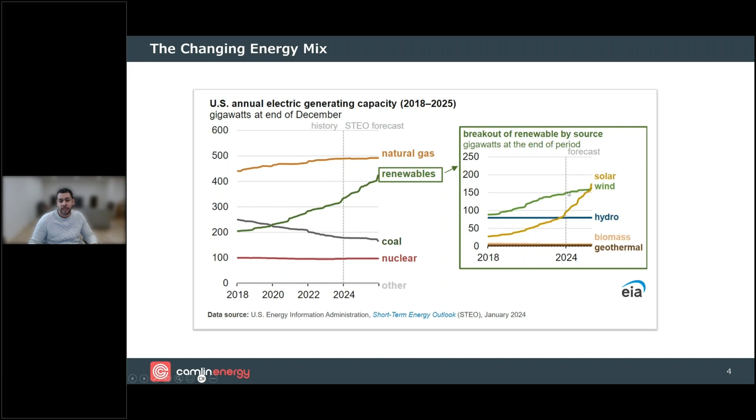So what that means is that fluctuation has to be absorbed by the other conventional generation sources that are available, so both hydro and natural gas. So although we see the rapid rise in capacity, that doesn't reflect in actual generation in kilowatt hours that's distributed.

So we kind of preempted that, but the operating changes, what that means for hydro and fossil fuel, obviously reduced utilization. That's an intended outcome. We want to reduce fossil fuel generation. Hydro, we want to optimize that as well, but the wind and solar, when they're available, it's important that we maximize their utilization. We don't have the same capability at scale to store as we do with hydro.

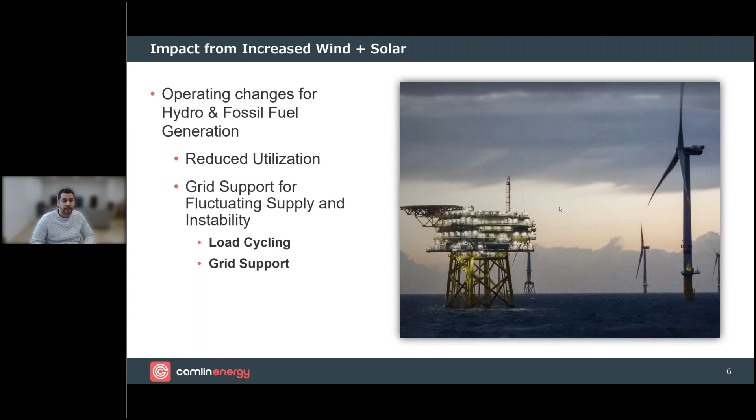Fluctuations in wind and solar will require that fossil fuel generation goes into frequent operating transitions. This is load cycling, the process of going from high to low load in shorter periods of time.

The problem with that is it leads to deterioration of these assets. The thermal stress imposed by forcing them from high to low temperatures and low to high temperatures forces expansion and contraction of the physical components. Deterioration can also be imposed just from mechanical fatigue. The fast changes in temperature, the expansion, contraction, but also the vibration that's ever present can lead to things like deformations in the assets as well as cracks to some components. All of this can result in increased maintenance and reduced lifetime.

Generation that has traditionally been base loaded or at least predictably loaded - even hydro, though normally cycled between daytime loads and nighttime pumping of water for storage - will also be cycled more frequently as wind and solar become available throughout the day. So this impacts both hydro and fossil fuel-based natural gas generation.

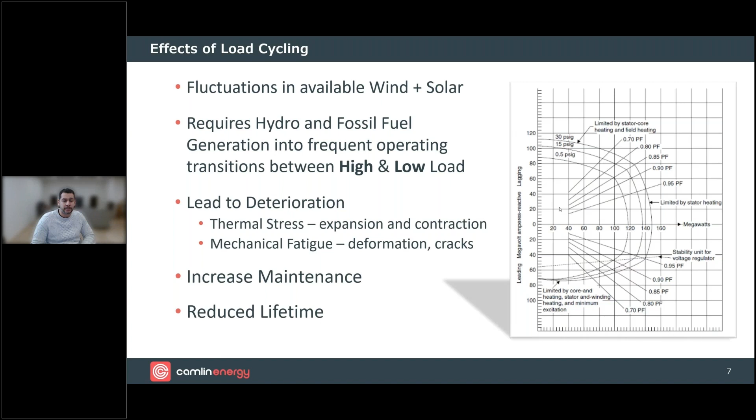Now, when we consider the stresses, I know there's a lot of intuition about how cycling can affect mechanical components - there's a greater inclination for understanding mechanical components. Cycling on and off is inherently stressful, but the stator winding is something that can be a little less intuitive and is often overlooked.

So here we have a figure from NERC showing failure rate data relating to the different components of a turbo generator. You can see that overall the stator winding represents quite a large proportion of the overall failures - it's the second most frequent failing component next to rotating components. But the stator includes the winding, core, and clamping structure. So when we consider the stator core and stator frame together with the winding as one entity, this actually exceeds the total failure rates for rotating components, making it the largest overall failure rate of any component associated with the turbo generator.

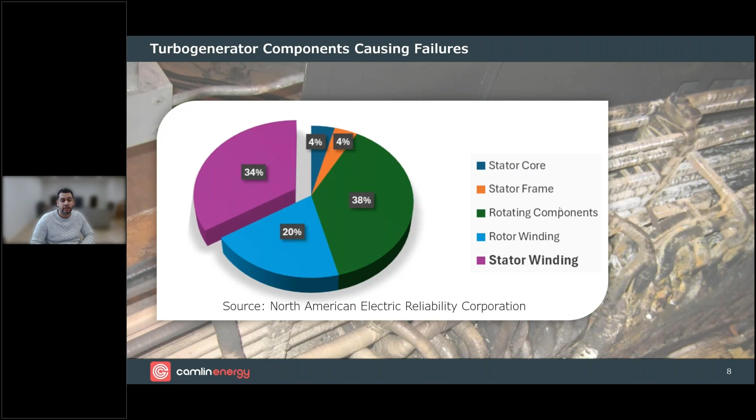So what are these effects? When we consider mechanical fatigue, this includes all the components relating to the stator - the core, the frame, the clamping structure, and the laminations. When we force a unit through frequent load cycling, for example, we can end up with a loosening of the overall system because of fatigue and more consequential core vibrations.

Fatigue on components, particularly the clamping fingers, can cause a lot of damage. You see here on the right panel two images. The upper image shows the effects of fretting - movement of the core and vibration causes fretting that deposits rust and debris onto the winding end arm surfaces, which can compromise the insulation of the end arm regions.

In an even worse case, in the lower right picture, we can see the clamping finger is actually missing. Just from vibration and embrittlement over time, mechanical fatigue to those components can cause breakages and loss of clamping fingers, and this becomes a more serious risk - a clamping finger in the stator could cause a lot of damage if it catches between the rotor and the winding.

And even just the abrasion - this movement causing abrasion to the winding surfaces - can lead to shorter times to failure. Part of that is when you have this abrasion and vibration on the winding surfaces, it can lead to removal of some of the semiconductive coating that's there to provide appropriate grounding of the stator slot, and that can lead to sparking discharge when you have that kind of abrasion.

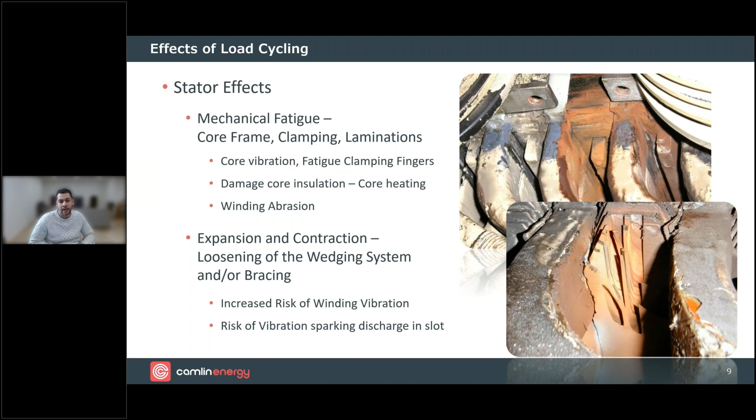The load cycling also affects the internal insulation. We just looked at external effects to the winding, but internally there is an effect too. This is something quite commonly understood. There's actually a design type test for testing cycling effects on winding insulation, typically done in laboratories to qualify a new winding design for a generator. These are described in IEEE 1310, for example.

The intention of the test is to simulate the load cycling by cycling high current through the windings. Here on the right panel is a test setup at the Manitoba Hydro Lab in Winnipeg, Canada, where they cycle high current through the winding.

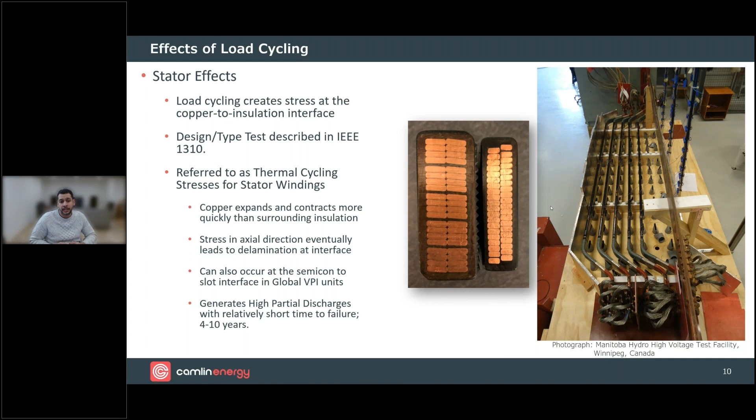With that high current, the copper in the interior has a larger coefficient of thermal expansion than the surrounding insulation. When that occurs, it can impose stress at the junction between the insulation material and the copper itself. That expansion creates a shear stress, in the axial direction, and that shear stress can lead to voids and delamination at the junction between the copper and the insulation.

Here's a sample photograph from a text showing thermal cycling effects, where you have separation occurring between the insulation and the copper. When that occurs, you end up with high electrical stresses at this region that lead to high partial discharge activity, which can be one of the shorter times to failure, within 4 to 10 years.

The effect of axial stress and thermal cycling can also cause delamination at the slot interface for global VPI units, where the insulation is impregnated into the core assembly with the windings installed. It's important to have bonding between the slot section and the core. If that becomes delaminated, you can have discharges at those sites as well.

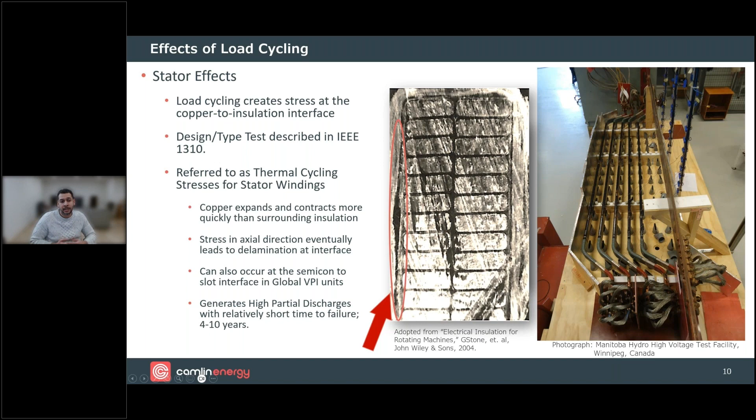So load cycling is one component. The other to consider is the effect of operating as a grid support. Generators, to support the ingestion of more wind and solar, need spinning reserve as well as system support for the fluctuations.

The fluctuation in supply requires generation on the grid connected for voltage support as well as frequency regulation. Operating generators this way might not be intuitive, but operating something traditionally base loaded at low loading levels, when connected to the grid, can sometimes have adverse effects for units not normally operated that way.

Operation at low efficiency can impose more wear and tear, since generators typically aren't as efficient at lower loading levels. Also, there's a coefficient of expansion of the overall winding within the slot, so at higher temperatures, vibration of the windings in the slot sections might be reduced.

If vibration is reduced at higher loading, when you back off to operate at low loading, there may be a slight contraction in the windings, resulting in a looser winding. Loose winding is already a problem, as we discussed earlier, since that vibration can lead to discharge at sites within the slots of the winding.

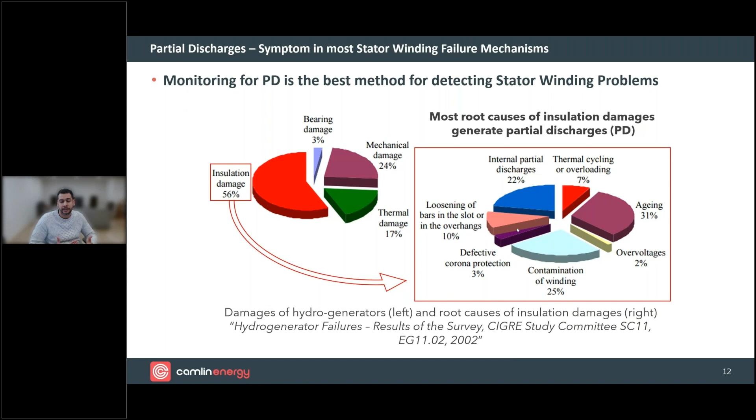As we focus on partial discharge relating to these specific defect modes, this reinforces why online partial discharge monitoring can be a very valuable tool in identifying defects associated with load cycling, running units for grid support in this situation where we have to ingest more renewables.

The first one relating to loose bars and vibration is related to thermal and mechanical fatigue. Fatigue of components like the wedging system or the bracing is attributed to expansion and contraction of the winding with frequent cycling, and that can loosen these systems and lead to more vibration due to loose bars.

Partial discharges relating to loose bars and vibration are generally well observed at higher loads, since greater magnetic forces are imposed on the winding. If it's loose, we're more likely to see those effects in that operating region. Abrasion relating to this vibration can also lead to additional slot discharges.

For aging and thermal cycling stresses, we can detect these discharges correlated to low temperatures. At higher temperatures, expansion of the materials may reduce the overall void size, and the partial discharge inception voltage is a bit higher. So it's really at lower operating temperatures that partial discharges relating to aging or thermal cycling stresses would be more evident. If we operate at reduced load for grid support, and the generator isn't typically operated at low loading, this can be an accelerant for PD deterioration.

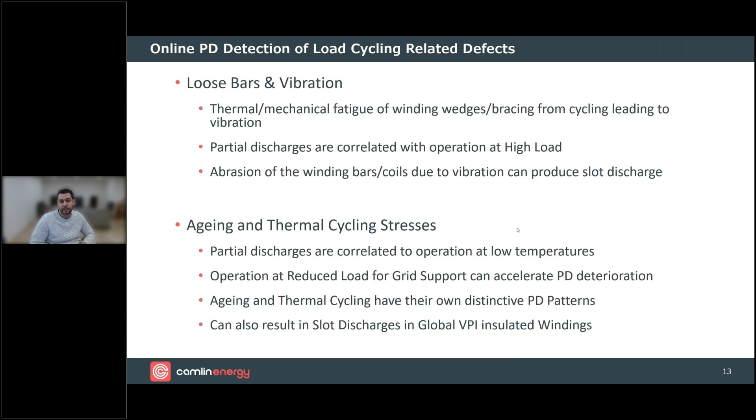Looking quickly here at slot discharges, we can see the effect of loose bars. This is where thermal and mechanical stress on the winding have led to fatigue, which has introduced more vibration in the winding. That fatigue could be associated with the wedging system, the bracing externally in the end winding regions, but also could be due to winding shrinkage.

Partial discharge is correlated with high loading in loose bar situations, and this is intuitive because at higher loading is where more magnetic forces will act on the winding, leading to more vibration.

There's some thinking that when approximately 30% of the semicon is lost, that's where you run into a danger of failure being likely. Partial discharge characteristics for this tend to have larger pulses on the positive polarity than the negative half cycle. Progression to failure can be quite quick in this case, roughly two years.

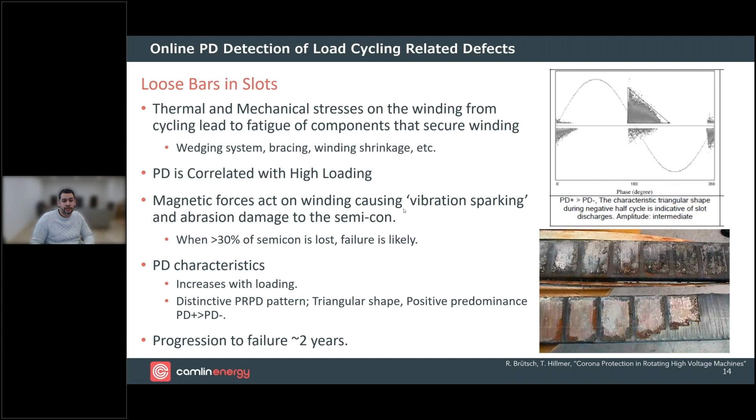In terms of end winding vibration, we've already looked at some of these cases, but abrasion of the semicon regions can be quite a problem here, and failure can also be caused due to cracks in regions of the winding.

We can see here a crack in the end cap, so some indications of movement of the winding at this location. These vibration and movement effects in the end winding regions can be detected with fiber optic vibration sensors. But similar to the previous defect of vibration in the slot, you can have short times to failure here as well.

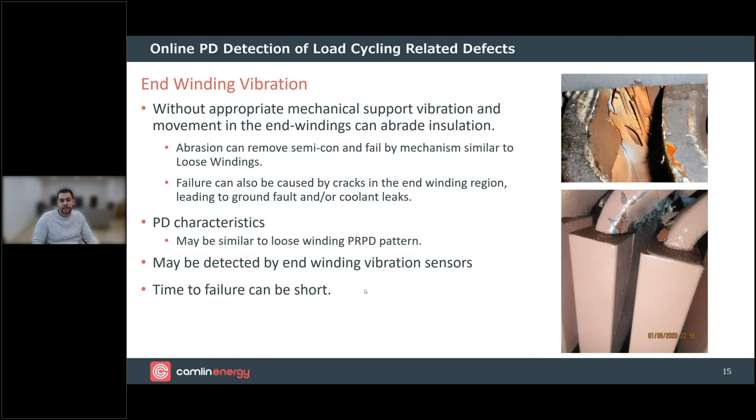For the aging or thermal cycling type discharge, we want to detect these by a distinctive pattern where they have kind of symmetrical partial discharge patterns on each half cycle. The cause of this is when, through normal thermal aging, it leads to debonding of the polymer, which causes voids distributed throughout the insulation system.

At low loading, if we're obligated to operate at low load for grid support, the discharge activity can be more repetitious in this situation, since the voids result in higher partial discharge at reduced load.

Conventionally, these would be quite long until failure, 25 to 30 years. But if a unit is already weak, already well aged thermally and has voids in the winding, and we begin to operate these generators for grid support, then the progression of partial discharges may be accelerated by this kind of new operation with more thermal cycles and more operation at lower loading points for grid support.

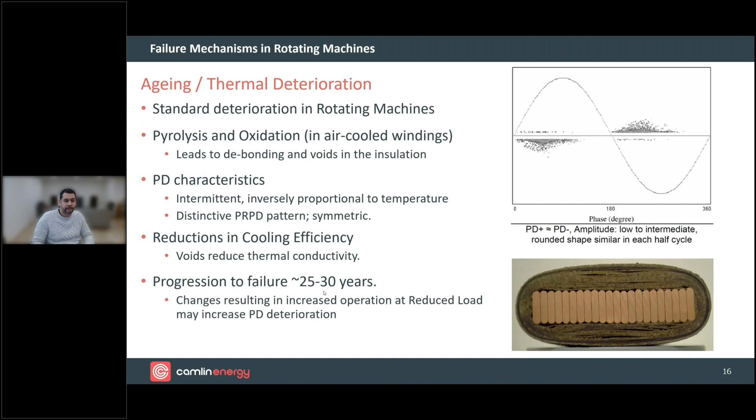Now, thermal cycling discharges can be detected by a distinctive pattern also, with higher partial discharge magnitudes associated with a negative half cycle. So with an online monitor, we'd be looking for these types of patterns. The starting and stopping operation leads to expansion and contraction, and when we have delamination at sites close to the copper, these can be defects that lead to pretty short times to failure, between 4 to 10 years.

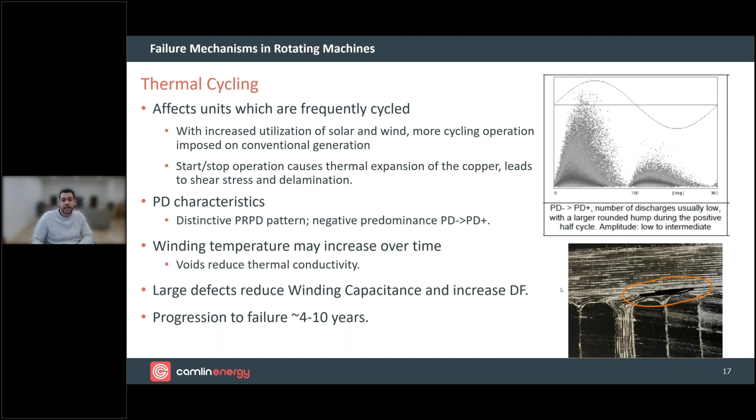With an online partial discharge monitoring system, it's not just a standard conventional measurement where many would do a spot measurement maybe at high loading. But as you've seen, some defects are more active at lower operating loads and temperatures. There is a dependence for the partial discharge activity based on the operating characteristics of the generator.

This has been identified in various industry standards and guides. The figure here from IEC 60034-27 actually prescribes measurement of partial discharges at various points within a procedure. If you can, run the generator initially at low load and then increase the loading to a high loading point, you would repeat PD measurements there, and then again once thermally stabilized, backing off on load and waiting for temperature to stabilize downward.

Measurement of partial discharge at each of these operating points would help identify certain types of PD defects that could be associated or attributed to load cycling or operating to accommodate renewables ingestion into the grid.

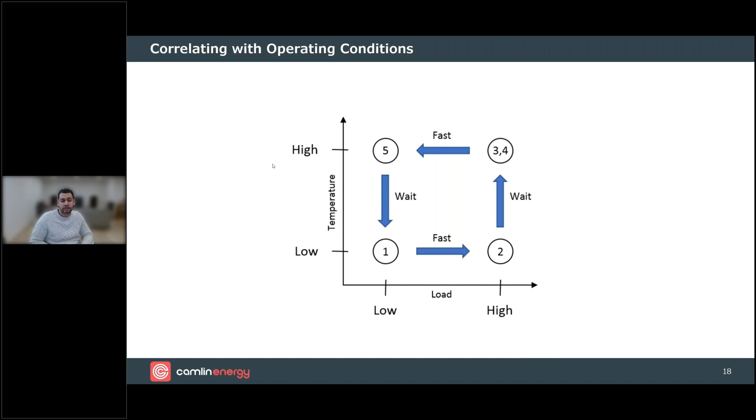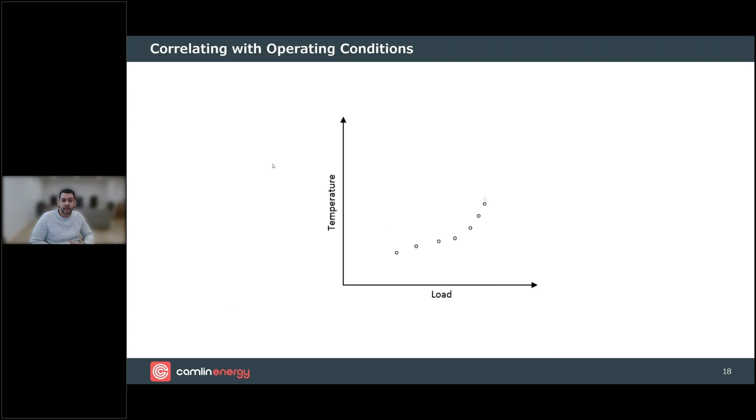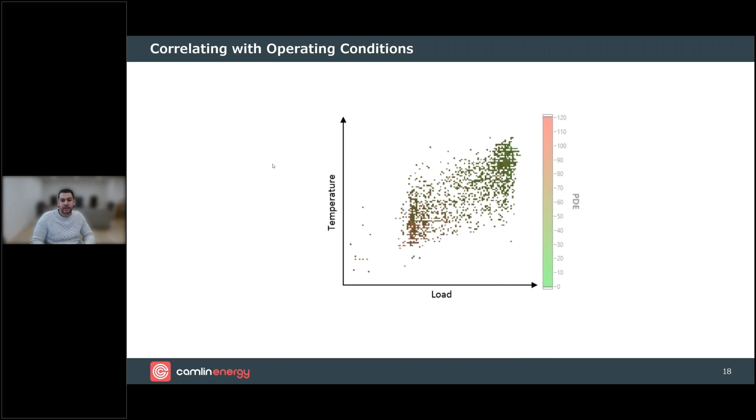So if this can be done passively, if you can have an online monitoring system that monitors the discharge activity at these operating points, we can then populate a large number of discharge acquisitions at various points of operation. Each of these points might reveal something informative about discharges in a specific region.

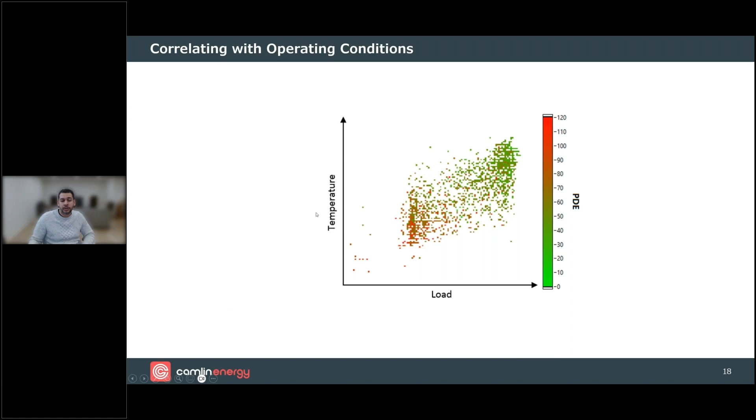We can see here at lower load and lower temperature, the colored red data points indicate higher discharge activity. So it's actually not in all instances up at the higher loading point, which is where generally I think many utilities perform their partial discharge measurements. But really, it's important to investigate the discharge activity and intensity over a range of different operating characteristics.

Relating specifically to monitoring for effects from load cycling, we can focus on the region at lower loading and lower temperature. At low temperatures, this is where we'd most likely notice effects from aging or thermal cycling defects. And if the defect is associated with loose winding and vibration, these would be observed up at the higher loading regions. So both of these are important to track and trend.

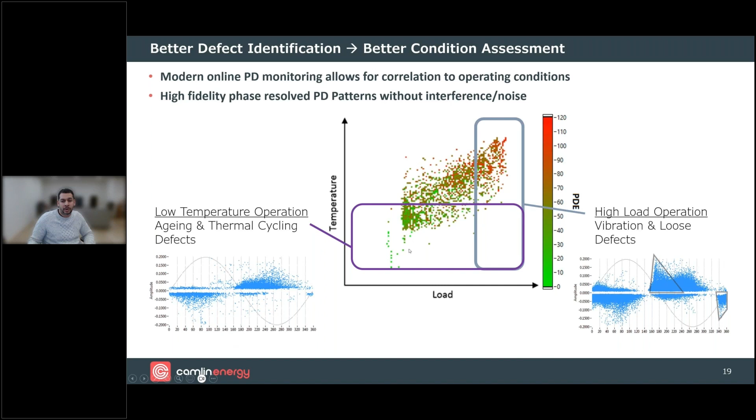With modern online partial discharge monitoring, we can do this correlation. We can see where these defects are present, and then, seeing where they are present, we can trend and make operating decisions that are appropriate for each generator at the time. If this is a bad generator for grid support because it has high PD due to aging and thermal cycling defects, then we may not run this generator for that purpose, and we may choose a sister unit for that application.

So, some key takeaways here.

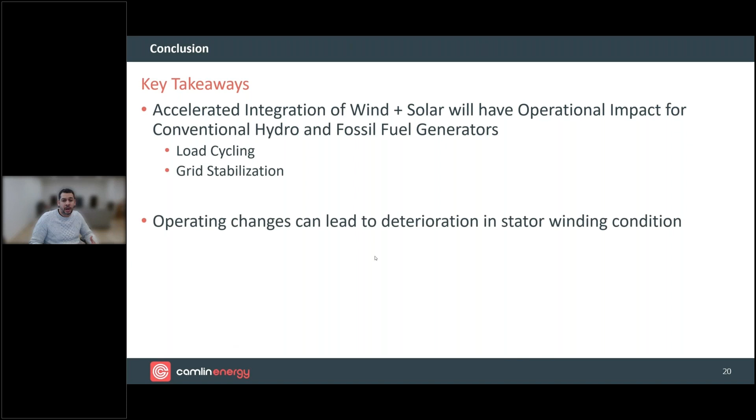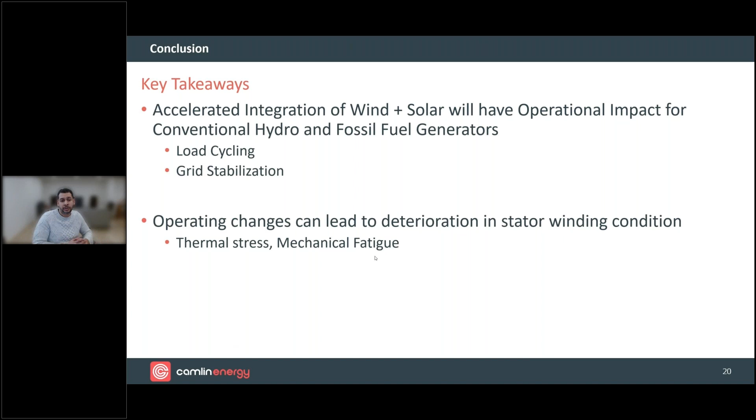The accelerated integration of wind and solar is going to have operational impact for some of our conventional hydro and fossil fuel generators. Effects from load cycling and providing grid stabilization can have an effect. If we're making these operating changes, they can lead to more rapid deterioration for stator winding conditions particularly. These degradation stresses relate to thermal stress, expansion, contraction, and fatigue that leads to mechanical issues. And for mechanical fatigue, there's the thermal effects, but also the vibration effect if a generator is obligated to run, particularly hydros, close to their rough operating zone.

Online partial discharge monitoring for detecting stator winding defects will be the best tool. And if we can correlate partial discharge information with the operating conditions, this will be a very important tool for identifying the nature of the defects, and that can inform maintenance. If it is a vibration problem, for example, this can tell us that condition-based maintenance, like re-wedging or addressing issues with lashing, would be the appropriate maintenance action to take.

Online PD monitoring enables condition assessment, and by doing so, it improves overall reliability for the generator. And by providing early warning to these stator winding problems from load cycling, we're of course achieving that.